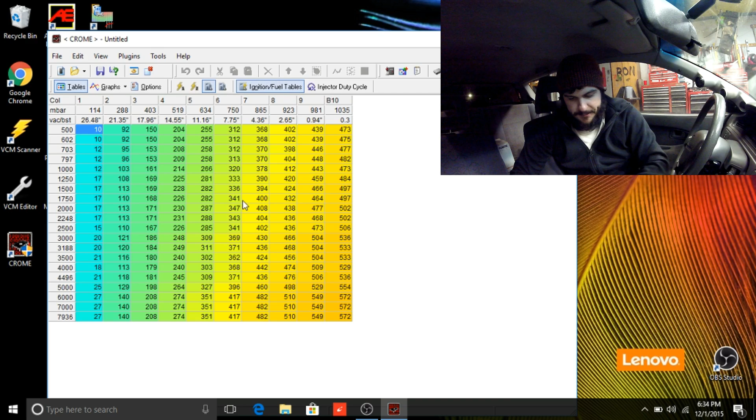But anyways, like I said, this thing is already tuned. I'm just going to make a completely new file for you guys and just go over this pretty much step by step. So I just went up into the corner here, file. I'm going to open a new P30 map, and then I'm going to add boost to this P30 map. So we're going to go to the plugins here under enhancements, and maybe it's not under that. It's under boost tools, right here. Okay, so advanced boost tools, and we're gonna hit OK.

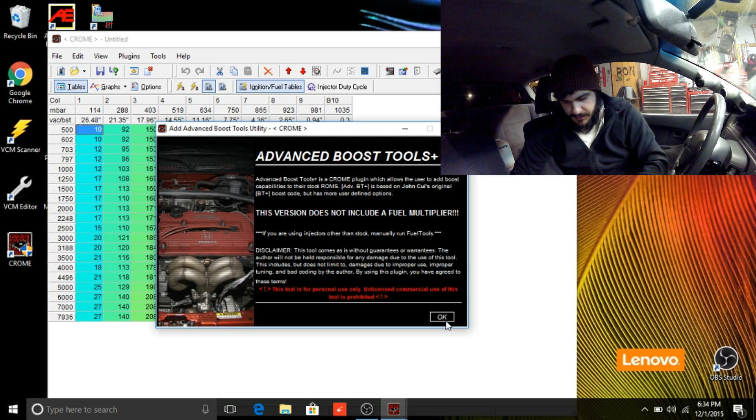Next. And then the car has a stock map sensor currently, which can read about 11 pounds of boost or so. Sometimes you can cheat them and run a little bit more, but we're just gonna stick with the stock map sensor right now. But you see here you can choose a 3-bar GM, 2-bar, 2.5 bar, all these different map sensors. It sucks you can't really use Hondata 4-bar map sensors or anything like that with CROME. The ones that I use, at least that work with CROME, are the stock map sensor, the Motorola 2.5 bar sensor works good, and a GM 3-bar. That's pretty much the only map sensors I ever use or ever recommend to use with CROME.

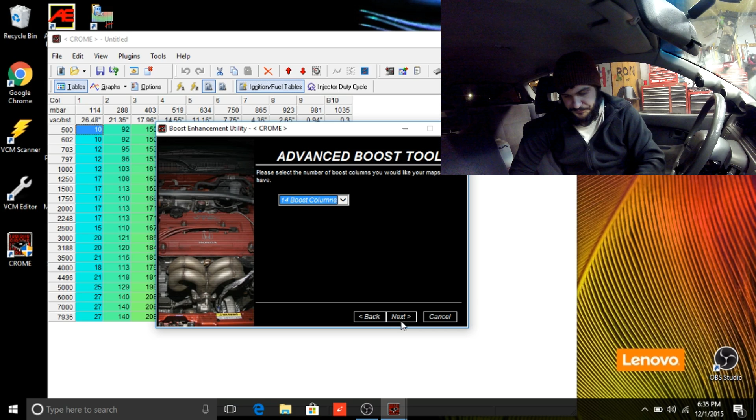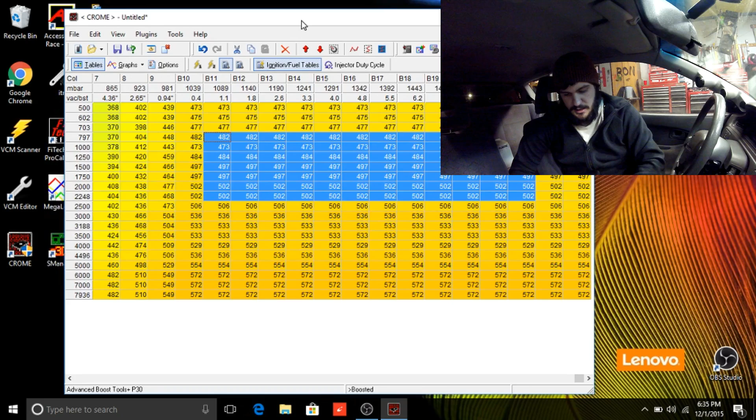And then we hit next, and now we're at this thing here where you can choose how many boost columns you want. I always choose the most amount of boost columns so you get the most amount of resolution throughout your table. So now you can see here we got a map made up to 11 pounds of boost. So these numbers here do not change as it increases with boost when you just do this automatically like this. So what we're going to do is go to boost table adjustments right here under tools, and I'm going to actually set these at the default.

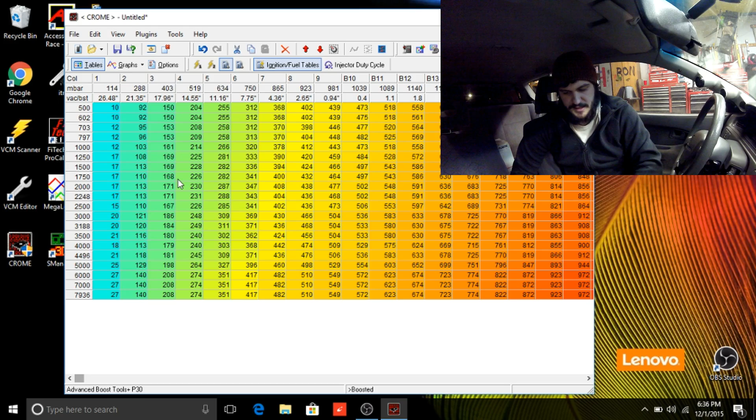I actually like to do this with these turbo B series motors. We're going to crank this up to 180% for turbocharger efficiency, and then the ignition, we're not going to touch that. I'll do that manually and show you how to do it. So once we do that, then we have more fuel added into boost here. And if we go under injector duty cycle here, you can see that, yeah, we're way over the factory injectors. Luckily, this car has a set of RC 750s, so we're going to go under the advanced tables here now.

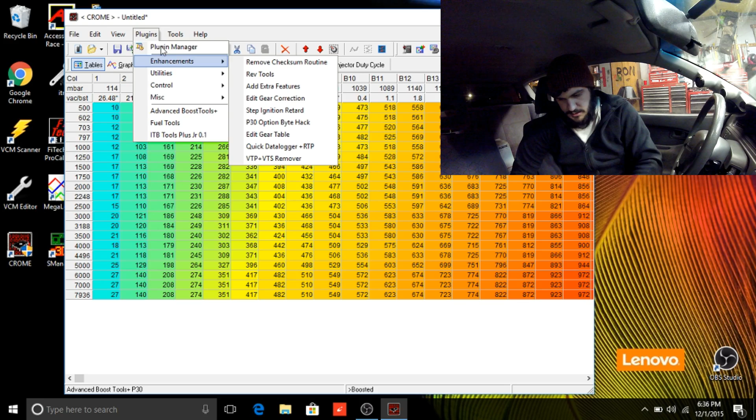Actually, before we do that, we're going to go to, where is it? Fuel multiplier. There we go. And we're going to change the old injector flow rate, 240 cc as you see here, and we're going to change it to 750, because that's what the car has currently. Then we hit OK, and notice how all this goes down, and we have a lot more injector to use in the car. So now that that's good, we are going to go to...

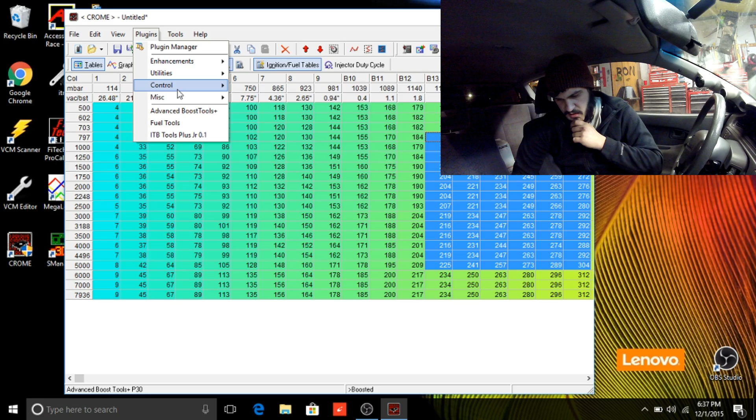Sorry, my dog is outside right now. He's like, what are you doing in there? Because I'm just sitting in the car doing this video for you guys.

Okay, so this all should be good. Now we got to go to advanced tables and set up the injector battery offset. So right here, you go to injector battery offset, and this is where you plug in your injector dead times for whatever fuel injector you have, if you don't have a sheet that came with your fuel injectors.

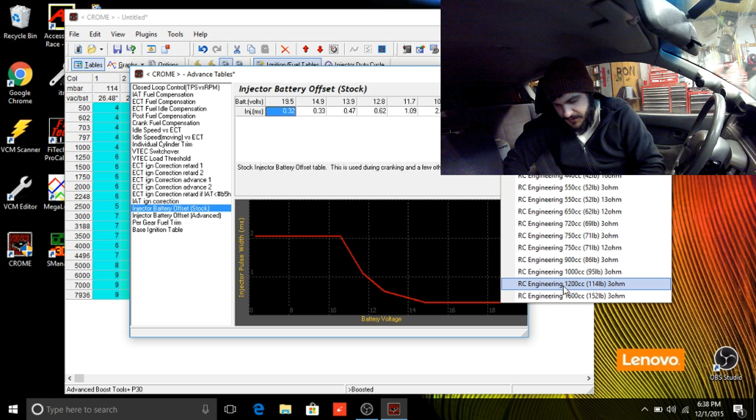A lot of times you can look these numbers up online, but Crome actually has a feature here where you click in the corner right here under more, and you can choose all these different injectors, and RC750s are one of them. Now there's two different ones here, 3 ohm or 12 ohm. These are the 12 ohm ones, which do not require a resistor box. So we're going to click that.

And then that should be it under the advanced tables. A lot of this stuff I don't usually touch, honestly. So now that should be good. Now we're going to go under options and do our sensors here. So it does not have a knock sensor. It does not have O2 sensors. And then I always disable these VTEC things in the debug mode. I always turn that off.

Turn the speed limiter off. Rev limiter we can leave at 8200. VTEC we can set at 5500. And then I always add extra features, which is under the plugins here. Add extra features. And now the car has the ability to have launch control, full throttle shift, shift light, and

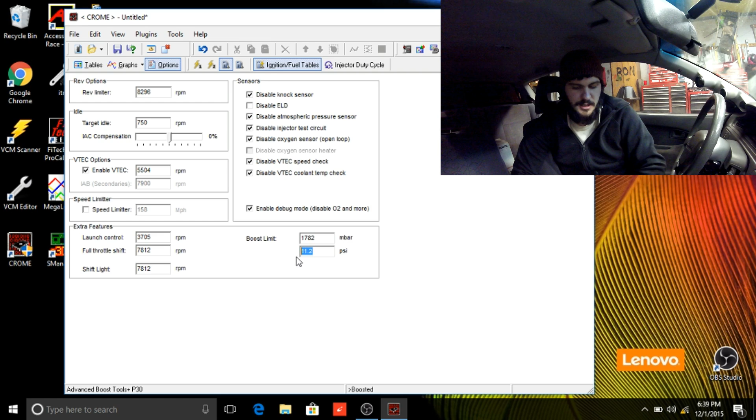a boost cut. Now the boost cut doesn't actually work on Crome. It only works if you have like a 3-bar sensor or a 2.5-bar sensor. It does not work with the factory map sensor. So that is one thing to remember when you're doing this.

Alright, so now we're going to make our ignition map. The low cam side here, a lot of times I don't touch it. I actually should have adjusted this accordingly, but what we're going to do here is once this thing starts coming into boost, so like right here on this column here is 0.5 pound of boost, 1 pound of boost, 2 pounds of boost, whatever. We can probably leave it until it gets to like 4 or 5 pounds of boost, so like right here.

I'm just going to highlight all the way over, and we're going to start pulling 1 degree out. So we're going to go to here, highlight all this, -1. And then we'll take a column that we didn't do here, go -1. Until we get to like 20 degrees. Once it gets to like 20 degrees of overall timing, what am I doing here? Okay. Once it gets to like 20 degrees overall, like up top where it says 22 down there, once we do enough of these, it'll eventually go to 20.

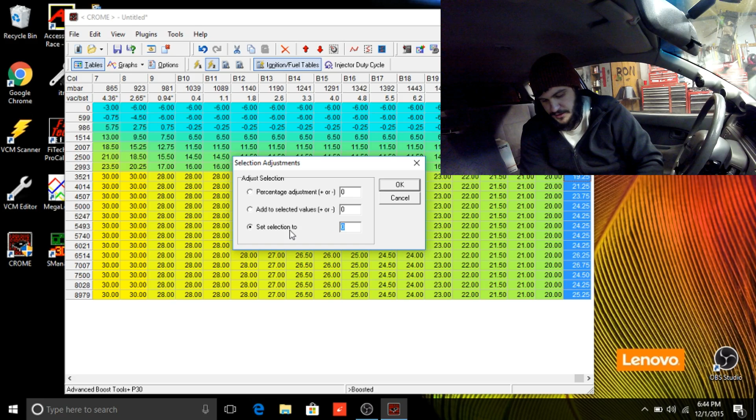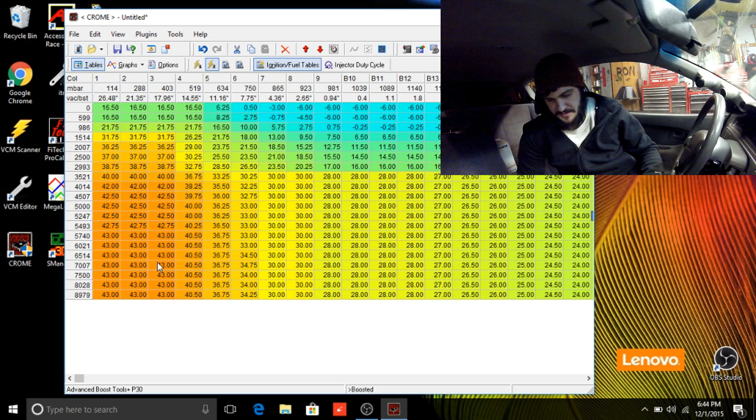Like I said, for E85, this timing map is going to be a lot different, but this is just kind of a general thing that I do. And then once we start getting up into higher boost, we'll set her at like 18 for 11 pounds. And yeah, that is pretty much how I build a base map with Crome. And notice here, a lot of this shading right in this area is darker, and then the numbers go lower, higher, etc.

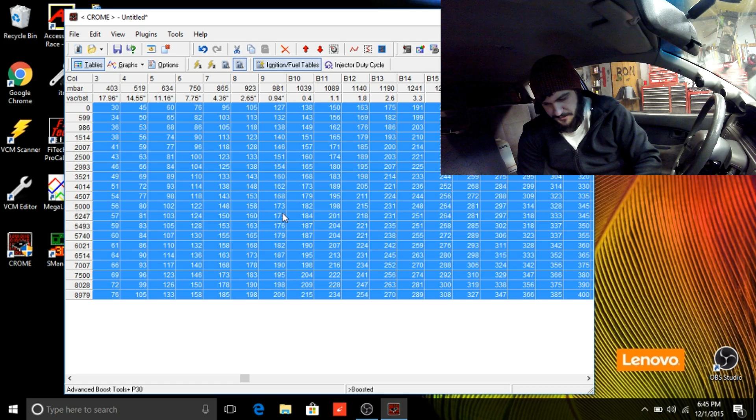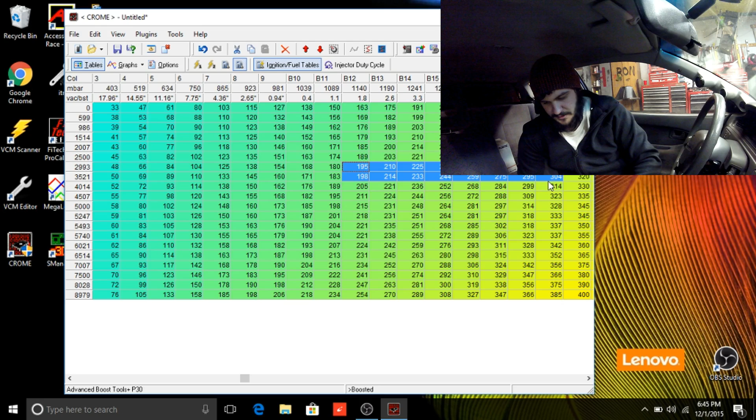So what I like to do is take the whole damn map, and we're going to interpolate it a few times. Okay, it didn't do anything, so we're good. And then we're going to smooth it all, smooth it a few times. Now these numbers should be gradually increasing as RPM increases, and increasing as it goes left to right here. And then we're going to do that to the other side here too. Interpolate, interpolate, smooth, smooth.

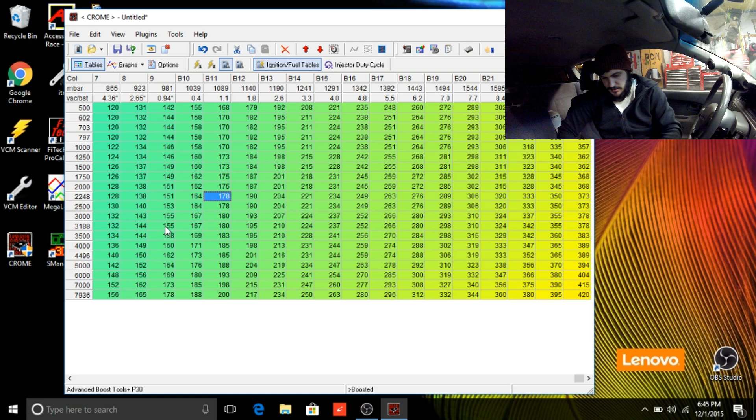All right, so now everything should be good, and we'll pick up next once we get the car fired up and see how everything's running. All right, so now I got Crome open back up here. Hopefully this is synced. Sync, sync, sync. Okay, whatever, I don't know. Never done this before, I'm just going on a whim.

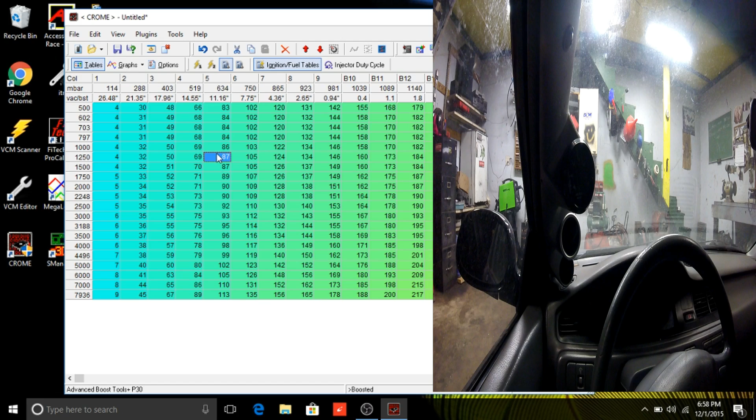So now that we got this loaded, I'm going to plug in the car, the chip burner Ostrich thing. Once I get that plugged in, you can see this stuff pop up right here, which just means the car is hooked up to the ECU. So we're gonna hit write, write all those changes that we just did, and turn the key forward. Okay, our check engine light went on and then off, so that should be good. And we're gonna see if this thing fires up and how it runs.

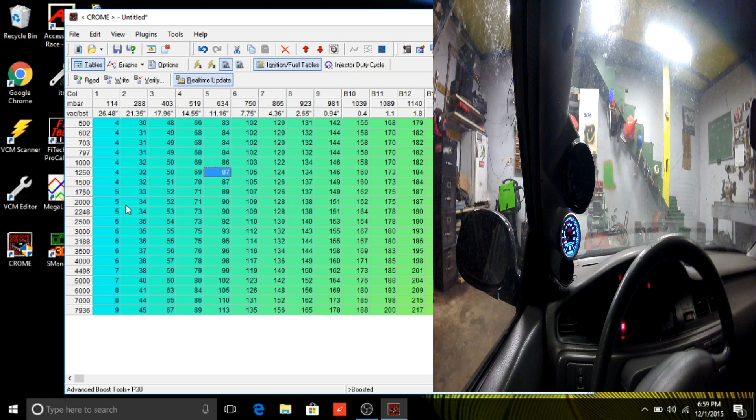Okay, it's really lean right now, so what I'm gonna do is take the whole map and add in like 20%. Boom. Okay, that wasn't enough, so we'll go another 10%. There it goes. Now it's sitting at 14.7 just sitting here. Now I added 30% to this whole map, so I'm going to make sure I go over to the VTEC side and do the same thing. Add 30% in.

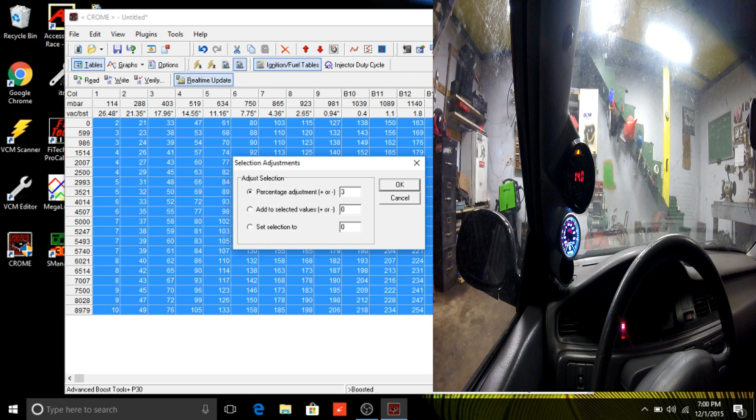Sometimes the injector calculators, where it does 240 to 750s or whatever, under the fuel multiplier thing here, are a little off and don't work that good. I'm also not data logging. I'm doing this the old school way, to show you that you can do this without data logging. Obviously it's a better idea to data log, but I don't buy any of the data logging stuff for Crome because it sucks and doesn't really work that good.

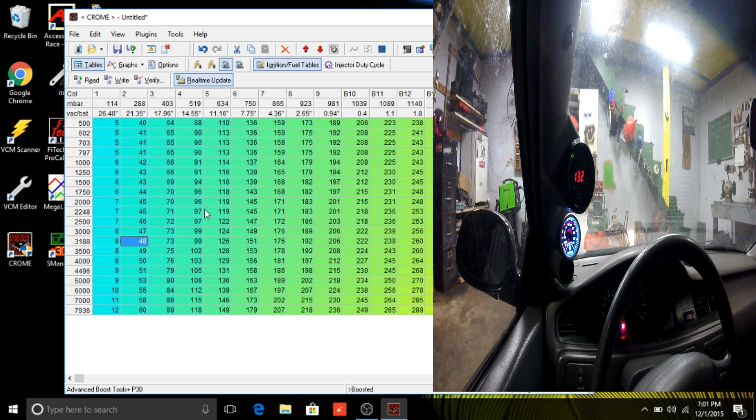Now with Hondata, it works a lot better, and in a future video maybe we'll do a Hondata start to finish video like this one. But anyways, car's running pretty good now. It's obviously going to run a little richer when it's cold, whatever. Okay, so car's running good. Now we're going to let it warm up, and once it's fully warmed up, we will start driving around.

Okay, so the car is warmed up now, and it is idle surging. You can see it's kind of bouncing like 1200 to 1600-ish. And yeah, so what we're going to do now is we're going to play with the fueling a little bit. We'll go back to tables here.

Yeah, see, sometimes it stays steady and then sometimes it dances around. This could be just a mixture of things. Dirty idle air control valve or something like that. But we're going to adjust the idle area here, so

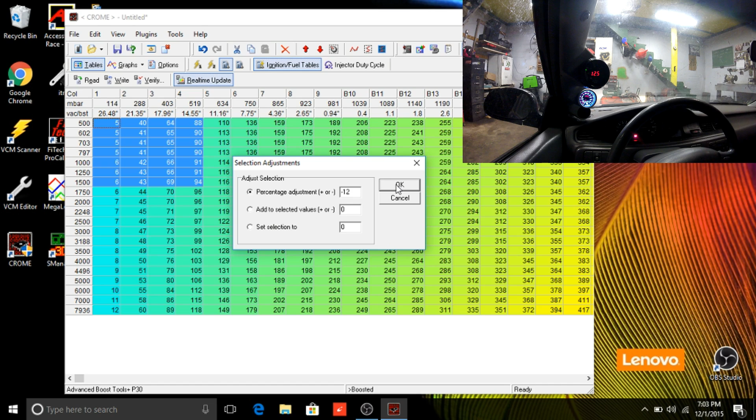right now it's currently idling at like 1200, so we're gonna adjust up to 1500 here, and it's currently sitting at 12.5, so I'm gonna take out, we'll do 12%, and see where that lands us. Now that landed us like a 13.5 air fuel, so I'm gonna take out 5 more.

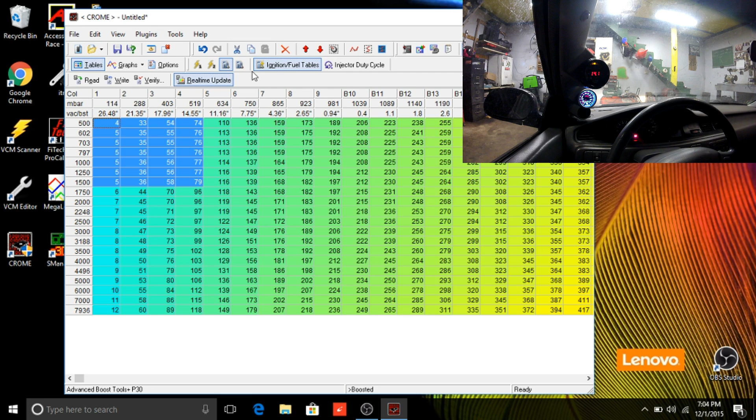That puts us right at like a 14.2, 14.5. It's going to dance between probably 14.0 and 14.5. I'm going to call that good for now. And the idle is still high. So I'm going to go over to the options menu here.

And I like setting the target idle a little bit higher. They seem to run better with it targeted a little bit higher. And then I'm going to bring down this idle air control motor right here to -10. We'll try -20. It should calm down here

eventually. Sometimes this real-time update on Crome here is kind of slow and it doesn't work all the time. So I get in the habit of just writing everything manually. This thing's not wanting to cooperate with me right now. There it goes. Okay, so we're at -30 on the idle air control motor. That is a lot.

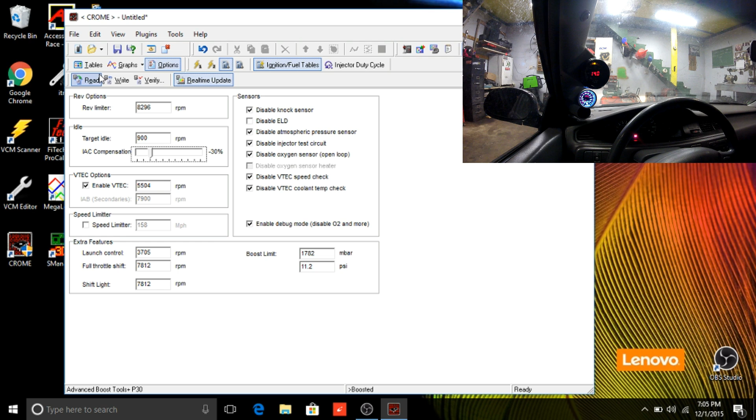But since we're that low and now it's idling good, right at 14.7, and the idle is chilling right at like 750. So I'm gonna give it a quick rev and see how the idle actually comes down and reacts. Okay, that actually turned out pretty good. So it came right back down, right to 750. Yeah, that seems pretty good. So I think for now, I'm gonna say that the idle is pretty well tuned, and we're gonna drive it.

All right, so you can see currently that the car is running like a 12.2, just cruising around. 12.8, it's in the 12s, cruising. So knowing that, I'm gonna put it in second, get the RPM up a little bit, still in the 12s, go down to first. I'm not going that fast, but yeah, okay. So we know as the table increases, it's getting richer, so that's good.

Now we're gonna adjust the cruising portion of the map, which is going to be, we're gonna start with this column here all the way over to 11. So between 7 and 11 in this area is kind of where we were driving just now. So we're gonna go from 1250 all the way down, and I'm going to take out 15%. Hit OK.

And then I'm going to smooth this portion out that I just adjusted. No, I'm not. Okay, I'm just gonna leave it like this, write it, and then we're gonna drive again and see where everything's at.

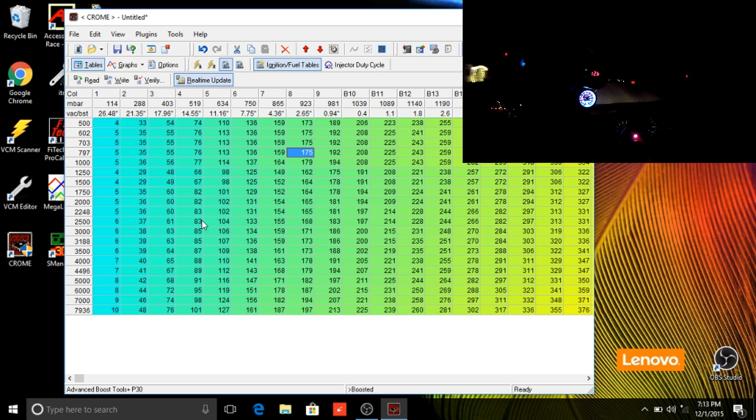When I start off in the pull, when you're first getting into boost, I like it to be around 13 to 12.5, and then as you build full boost and into VTEC, I like it middle to top 11s for a car under 10 pounds of boost like this one is. This car's on like 7 pounds, but okay, so we'll do a half throttle quick, see where it's at. Look at that. Mint.

Oh boy, this is going to be a lot of editing for me to do, but hopefully you guys enjoy it, and hopefully I'm teaching you a thing or two with Crome. Crome is fucking easy compared to a lot of tuning software, so I figured I'd get my feet wet trying to explain stuff with Crome, since I know it the best. Out of the softwares that I use, I know Crome very well. I've been using it for a while, so yeah.

So half throttle here, 13.0. That's what we want to see. Now we're just cruising again. And now I'm gonna floor it, and we'll see where it is at wide open throttle. It should be rich, so we should be good to floor it as long as half throttle is there, at like 13.0, 12.8, whatever. So now I'm gonna get into boost a little bit and see where everything's at. I'm in 4th gear. I'm gonna start the pull off at like 2,500 RPM, and here we go.

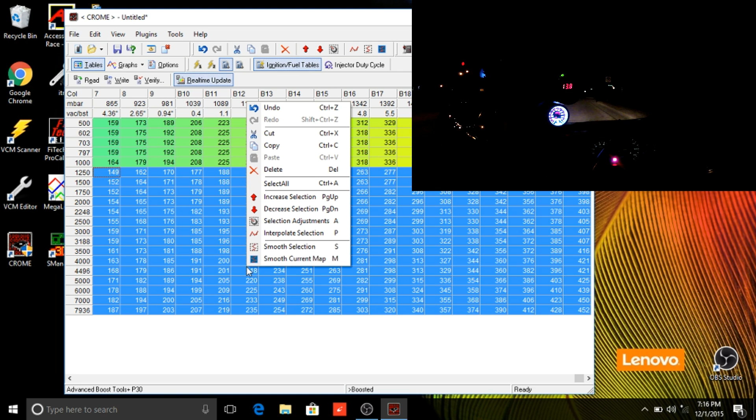Now I'm going to adjust the boost region here. So we're going to adjust, I don't know, probably from 0 pounds here all the way up. I'm going to take out another 10%. Kaboom. And then I'm going to take the columns before, so like from 4 to 0, take all this and I'm going to smooth it again. Smooth. Smooth. Okay. So now that that's all smooth and we adjusted it, we took out another 10%. We'll go floor this thing again and see where it's at.

2200, flooring it. All right, that looked pretty good. I'm actually going to turn VTEC off until we get the low cam map tuned in perfectly, and then we can turn VTEC on and tune the VTEC side. So what I'm going to do here is go to the options menu, and I'm just going to disable the VTEC. We'll write that, and we'll do another pull, because you notice how it went 10.0 there. I think it crossed over into VTEC. So the VTEC side is very rich, but like I said, we're going to focus on tuning the low cam side here and make sure that that is going to be good before we do the VTEC side.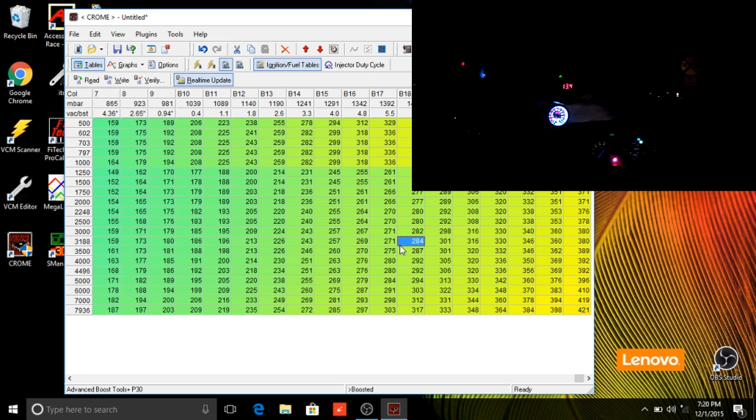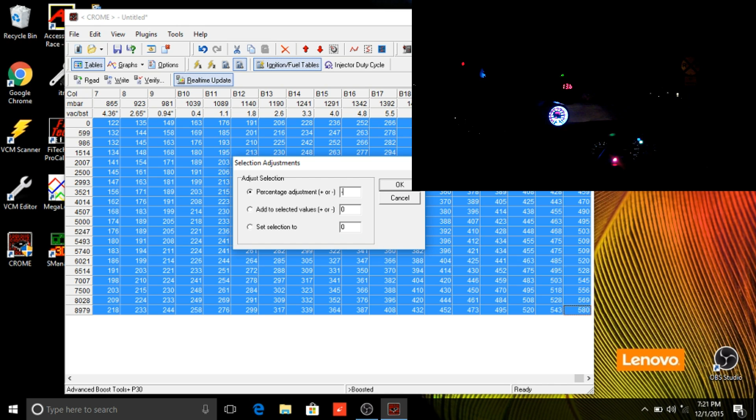All right, so now back on the computer here, I'm gonna go over to the VTEC side. You can see here, these are the spots that I did not adjust. I just leave that shit rich. You're never gonna see that anyway, so this is the area that it's mainly gonna be running in. But yeah, we're gonna go over to the VTEC side here, and we're gonna take out 10% because it went pig rich the last time I got into it and the VTEC was on. So we'll take 10% out of the whole damn thing.

Go to options. Turn that shit back on, set it at like 5,200. Turn the rev limiter back up to 8,200. And there we go, we'll write it.

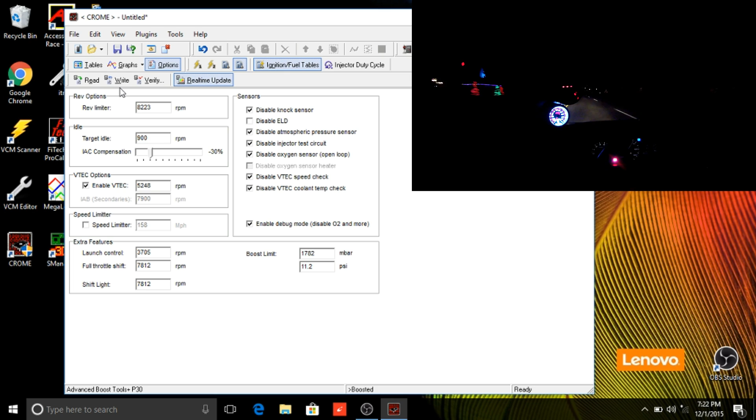All right, now VTEC is on, and I'm gonna do a pull with VTEC. So here we go. All right, so that 10% that I just took out took it from a 10.0 to, you know, about an 11.0, 11.1, 11.2. So we're getting closer. This car is almost done, almost tuned up.

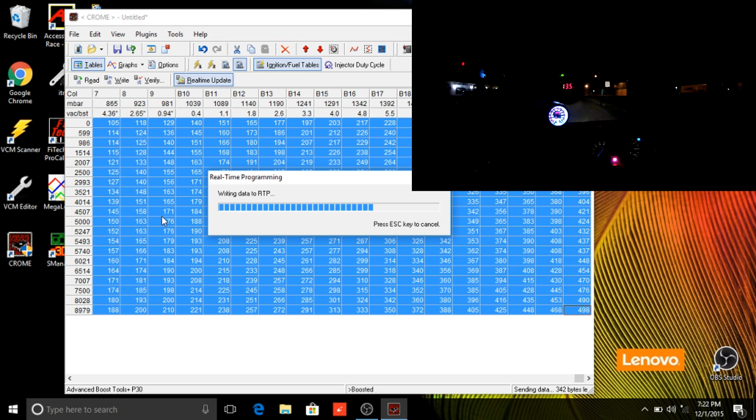So now I'm going to take out another 5% out of the VTEC side. Like I said, this is just a quick way to get your feet wet doing this. So I'm just going to take the whole map again. We'll do -5. There we go. We'll write that, and we'll see where we're at now. Here we go.

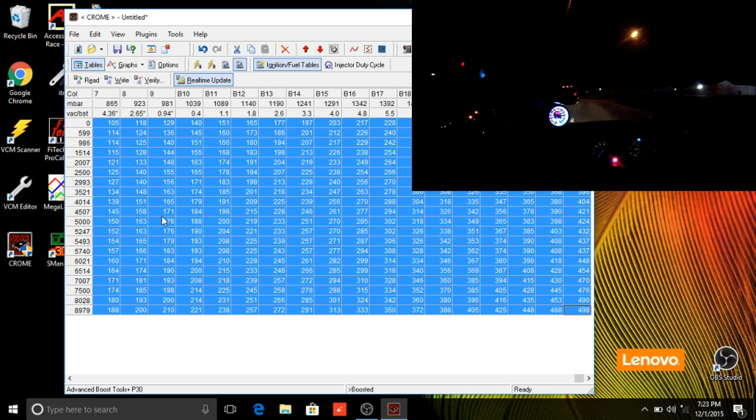Woo! You can definitely feel the car pick power up every time you pull fuel out of it. That's usually where you start gaining numbers on the dyno, is when you're leaning the mixture out and adding in ignition timing. But since we don't have a dyno, we're not going to be going crazy with ignition timing.

But a good way to tune ignition on Hondas is actually to, like, say the car right now is running like an 11.3. It looked like it was low to mid 11s there in VTEC, which honestly we could lean out a little bit more. We could take out another like 2 or 3%. But I'm going to show you guys something that might help some of you trying to tune ignition on the street.

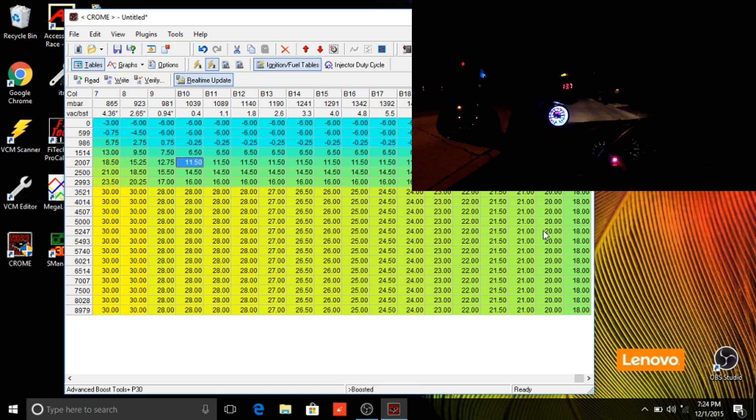So the car right now is running 20 degrees, 21 degrees, which honestly this is good. This is probably the most this car is going to want to take for ignition. So usually, a good rule of thumb, if you're tuning on the street and you're not going crazy at least, if you add ignition in and the mixture gets leaner, the car's making more power. So we're back in our happy spot.

Honestly guys, if I were you, I would not even honestly touch the ignition. I would just put the ignition where I tell you to set it, and you won't have any problems, as long as you don't, you know, over boost or anything like that. Now with E85 you can get into this ignition stuff a little bit more, and on a future video I will do ignition timing more in depth. But like I said, this will at least get your feet wet and whatnot.

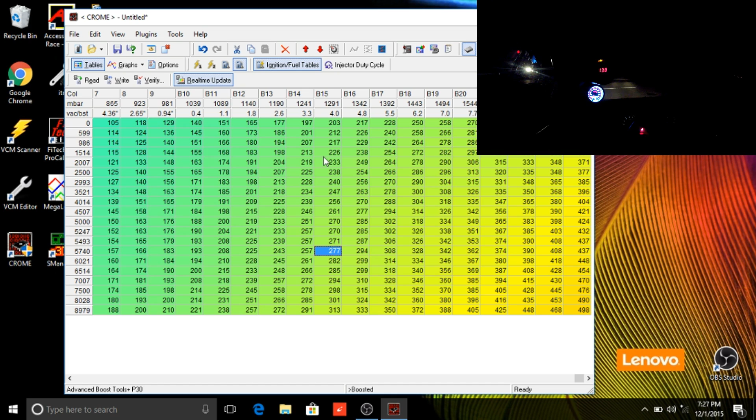Woo! This thing is dialed. Now we can beat on it a little, now that we know everything's good. I'll do a little second gear pull, see if she busts the tires off or not.

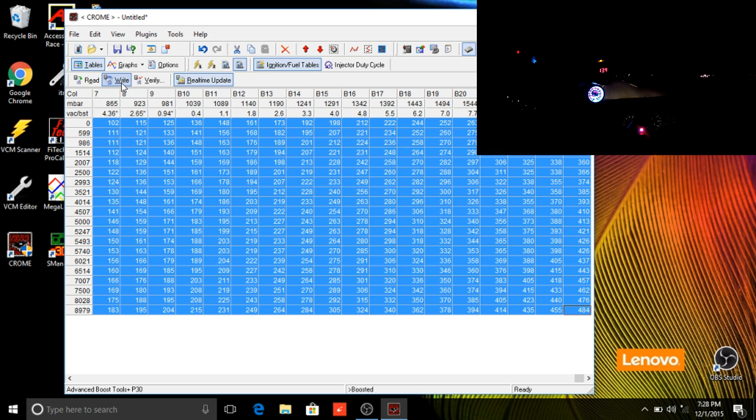This thing pulls fucking hard for 7 pounds of boost. It's not too bad. Honestly, this feels like a built single cam. And it's on 7 fucking pounds.

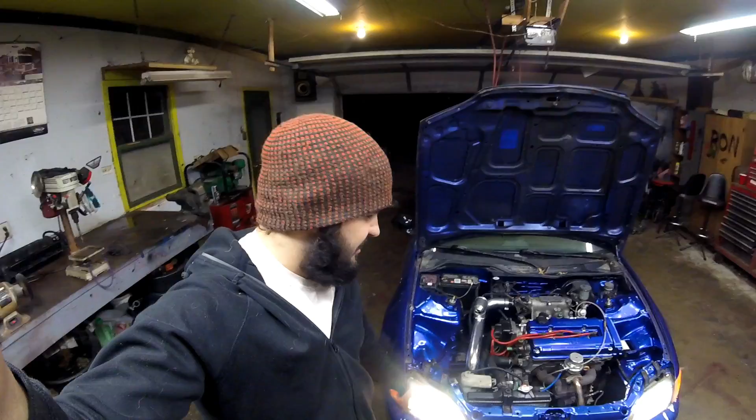Alright, so we are back now in the garage, and this thing's just sitting here purring like a kitten. So yeah, this engine definitely does need an oil catch can. You know, just that little bit of beating on it that we were out tuning, you can see that the oil has started to develop behind the motor.

I'm thinking that it's got a leaky cam seal or something like that, which obviously the leak is going to be worse with, you know, having excessive blow-by and no oil catch can. You know, just because it's a turbocharged application and stuff it's always a good idea, like I said, to put an oil catch can on.